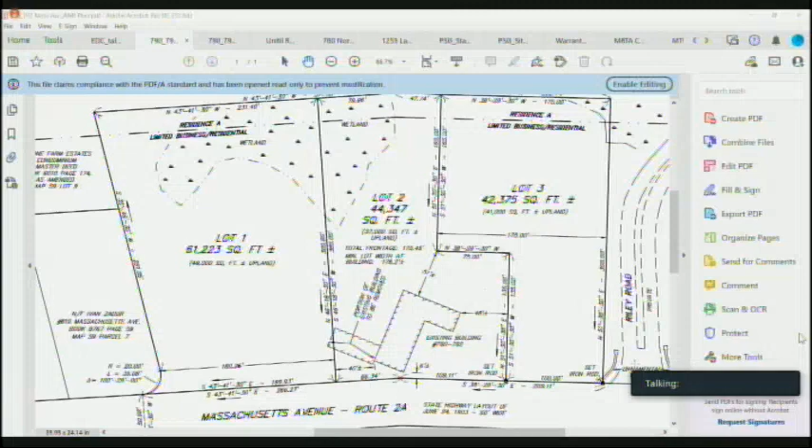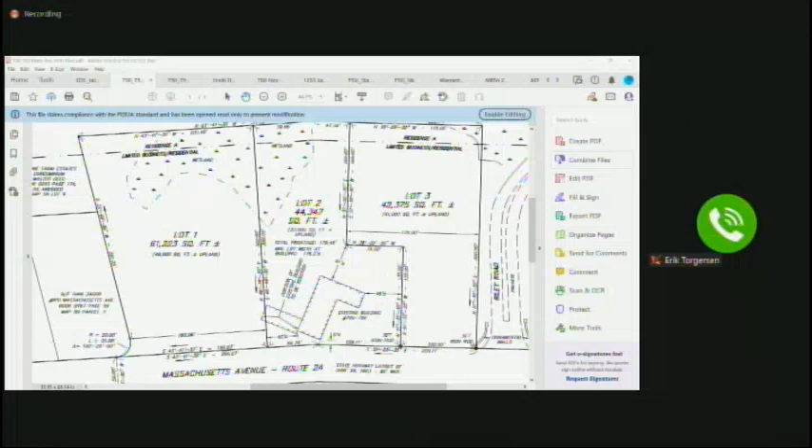All right. So Paula, Eric, any comments? I don't have any comments, Mr. Chair. Nothing, Eric? No comment. Okay, then I guess we could accept a motion to approve the A&R. So moved. Is there a second? Seconded. Excellent, Paula and Eric. We'll do a roll call vote. All in favor of approval? Paula? Aye. Eric? Aye. And an aye for myself. It is subdivided again. All right.

Economic Development Committee. So, it's a two-tier thing, and I don't think I sent out the second email, but J.C. Nickel is in the process of moving out of town. So she would not be able to continue to serve as an at-large member of the Economic Development Committee. Oh, bummer. She has offered her resignation from the at-large position and asked to be appointed to the ex officio business member position. J.C. Nickel.

Yes. Okay. And Josie Gilchrist, who's here in the audience, has put her name forward through the talent bank as a potential resident at large. I believe Josie also owns a business, so if she wanted to come up, you could come to the podium.

Certainly, if you'd like. Introduce yourself. So what this would do is this would fill one more seat on the committee, and then the last open seat would be that to be appointed by the Open Space Committee. Okay. Hey, welcome, thank you. Hi, I'm Josie Gilchrist. I've been a resident in Lunenburg for 4 years. I'm from Oklahoma. I own You Name It, Life and Home Revamp. It's a home improvement company. We've been in operation for 2 years. But I think I can serve you guys pretty well. I'm in the thick of it, so.

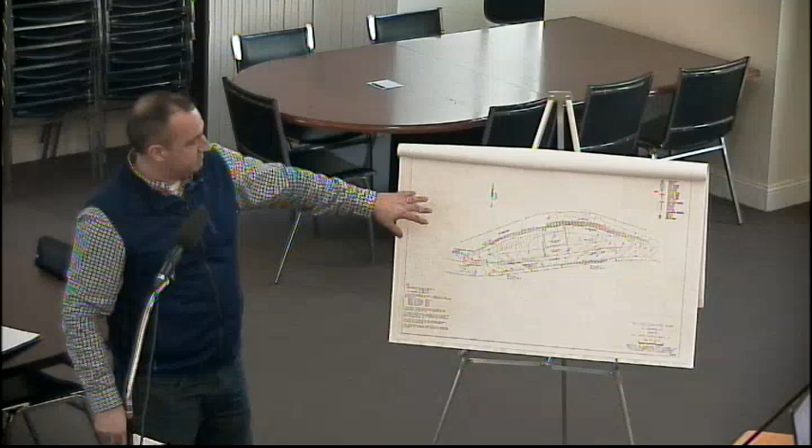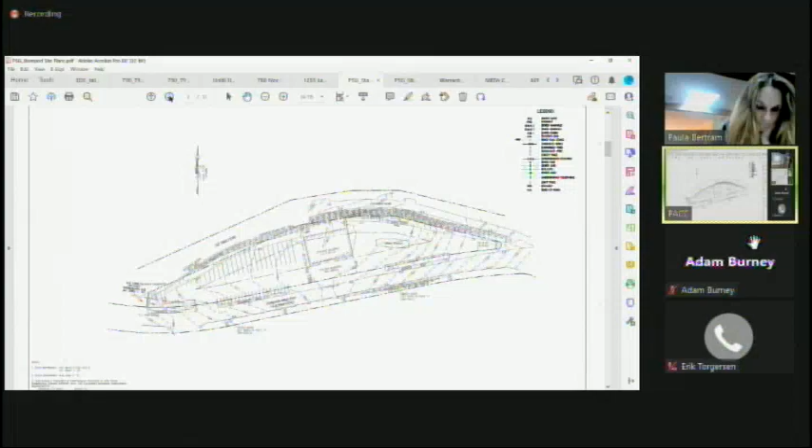So the existing site, I'd like to mention, there's a septic system on the property, and the building right now is served by a public well. The well is located in the parking lot right in front of the building. There's no stormwater infrastructure on the property. All the stormwater runoff runs into Leominster Shirley Road and runs down the street to existing stormwater infrastructure that's within Leominster Shirley Road near the intersection of Route 70. And a portion of the roadway also just directly sheet flows off to the east side and to the back where Low Places Ranch is now and where Jimenez used to be.

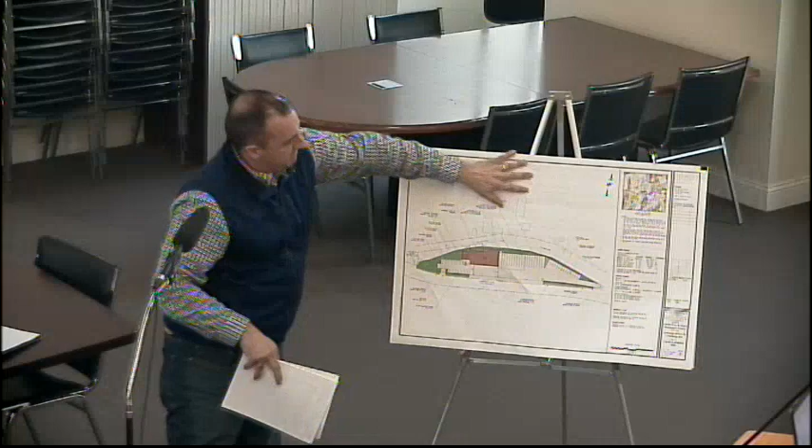So what you see here now is the proposed development. We've taken a site that's about 2.36 acres in total area. It was about 85% impervious, so the majority of the site was paved with the exception of some of the areas around the periphery of the site. We've proposed this building in this location now because the existing garage is going to stay in operation until the new building is constructed, because they want to keep the operations for the construction business, Palestone and Gravel, open while this takes place.

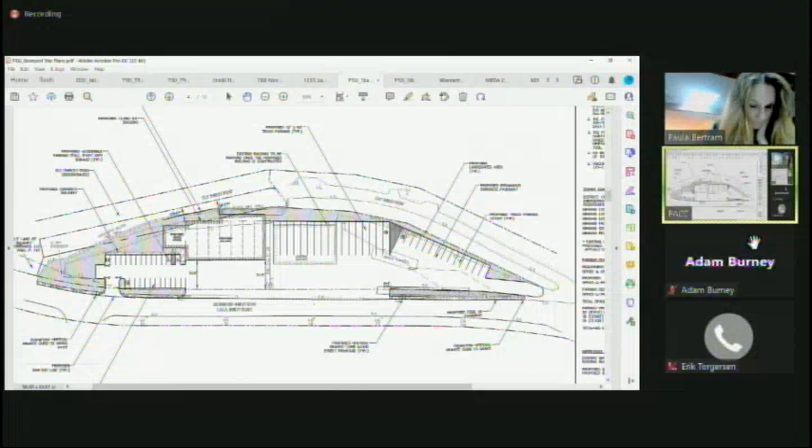So what we've done here is we've realigned all the parking on the west side of the property to keep employee parking and visitor parking separate from the main truck traffic. Right now, it's all commingled, so the employees and visitors park pretty much right in front of all the trailer trucks and the active construction vehicles that come to and from the site. So all the employee parking and visitor parking will be located here to the western portion of the site.

We're proposing a little bump out to the building. The main body of the building is a 7-bay garage. Office will be located to the side, and we have a tire storage and compressor room bumped off the back. So the main body of the building is about a 12,000 square foot building with a little bit extra square footage for office and storage areas. The existing building that's out there now is about 8,700 square feet. So building size will be increasing, but we are maintaining the existing setbacks that were approved through the zoning variance that was previously obtained.

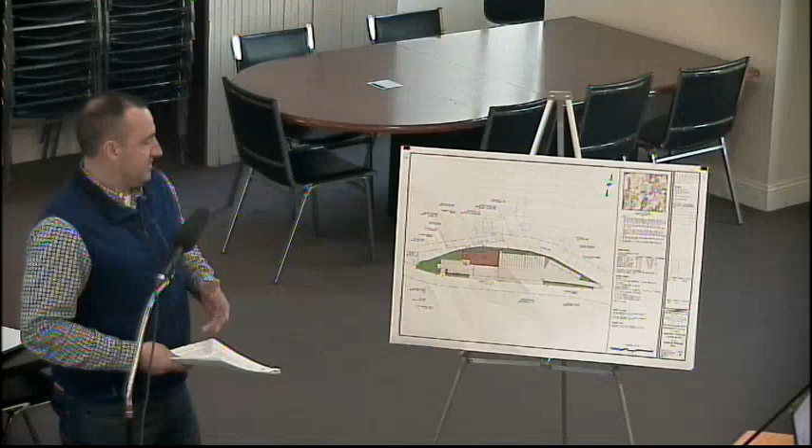The proposed site, as you see it here, results in a reduction in impervious area. There's a total of about 84 and change thousand square feet in the existing condition. It's about an 84 or so percent impervious cover. And we're proposing about a 4,000 square foot reduction in impervious area. So the site really is a redevelopment, but according to the new stormwater regulations in town, we're still providing stormwater infrastructure here to treat the 1-inch runoff volume, and to infiltrate and treat the stormwater runoff so we get our 80% total suspended solids and 60% phosphorus removal.

As I said, the existing site is fed by a septic system and a public well. The proposed site is still going to have a septic system. Right now, the septic is down in the eastern portion of the site. It's going to stay in operation while the proposed building is built, since the existing building is going to remain in operation. But the existing well that's on site is going to be decommissioned. Right now, we have plans in front of the water department. We're proposing to extend the water main from Keating's, from Reservoir Road, all the way up to the intersection of Route 70, and to feed this new building off of a town water main.

That's with the water department. They're in negotiations. So we've had discussions with the water department. We know this building can't be opened and occupancy permit obtained until that water main is extended. So we're looking for a condition of the approval from the planning board to condition that the water department is satisfied and the water main's been extended before the building or the applicant can receive their occupancy permit. However, obviously we need all the approvals in hand while that's kind of in the works.

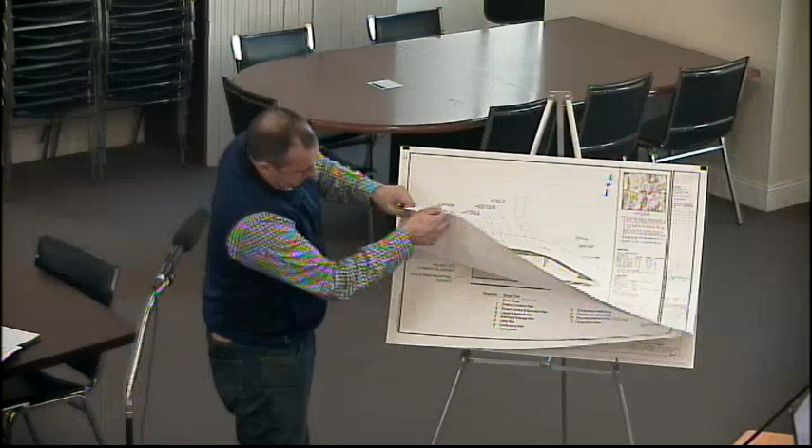So what I'd like to do is show you here a little bit more detail about stormwater on site. So as I said, the existing site, all the stormwater runoff just left the property untreated into Leominster Shirley Road. The proposed site is now being graded to have a stormwater collection system. There are catch basins proposed on site. We got one here by the office, an additional down by the eastern portion of the site on both sides of the pond. Those will be equipped with water quality units in order to achieve the 90% TSS before it's infiltrated.

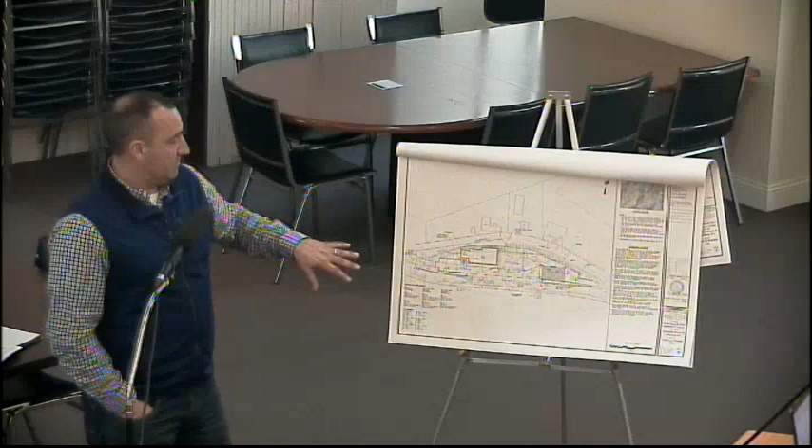The soils here are very sandy. They're great gravels, so we're not anticipating any issues with infiltration. However, we're proposing the infiltration basin right now where the septic system is, the current one. So one of the things we asked for when we put in a note is to do the soil testing for the stormwater during the construction phase of this. It's one of the comments that Graves Engineering made. They're in agreement with it. And we're asking to provide that information to you before the system's built. And Graves and the town will have an opportunity to review those test pits before the system's installed.

One item here that we're showing is a piped connection to the drainage infrastructure within Leominster Shirley Road. There are catch basins located along Leominster Shirley Road here down at the intersection, one in the middle, one above. So stormwater infrastructure, there is a pipe network within Leominster Shirley Road. We worked with DPW to find out the exact location of that, and we haven't been able to yet. And with the transition now with Rob Oliver leaving the town, we're gonna have to pick that up with the next DPW director and potentially test pit within the roadway to locate that. But we know there is stormwater located in there.

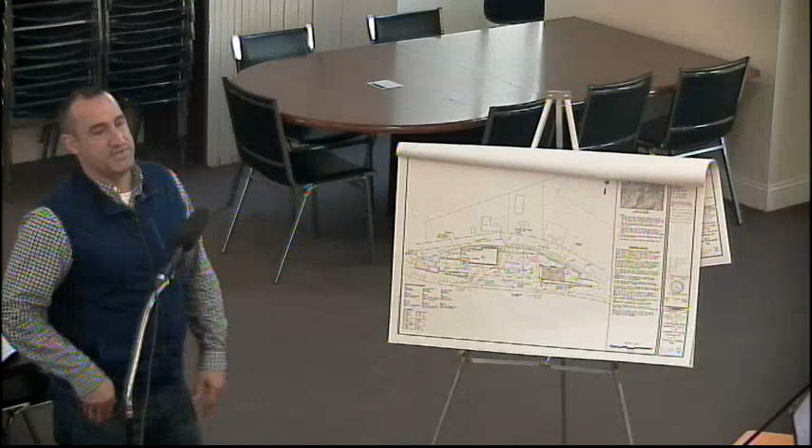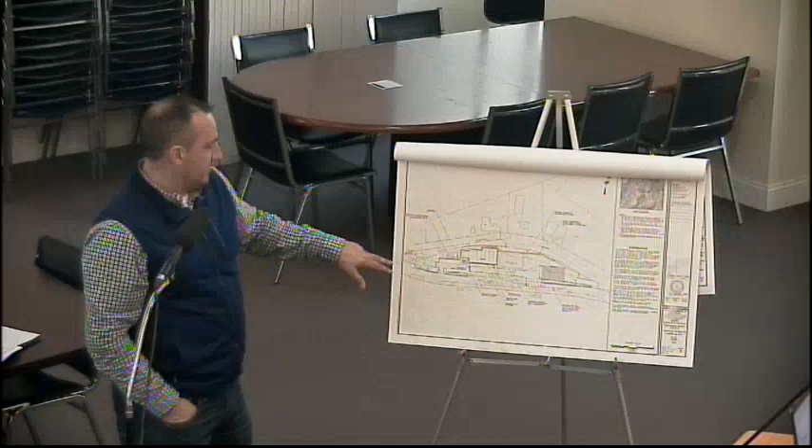And worst case, just below the property at the Low Places Ranch parcel, we know where the pipe is down there. So worst case, we would just have to trench a little further down the road to tie into the stormwater network. And like I said, that's the stormwater design. When it comes to utilities, the water we're proposing to pick up from the extension. The electric is available on site. Sewer, we're going to reconstruct the septic system. We have discussed this with the Board of Health, and Board of Health's on board. We just need to do a revised septic design and get approval for that at a later date. So we'll do that obviously before construction. And because of the size of the building, it will require a fire protection service. So that's another reason for the water main extension.

So that's pretty much the design. Graves provided their comments, which with the February meeting being canceled, we had an opportunity to revise the plans and resubmit the revised set to Graves so we could have our second round of revisions before the planning board meeting. And we've gone through all the comments. Pretty much everything was resolved. There were just a couple of comments left that Graves deferred to the planning board's judgment. So if we can, I'll just read through their comments and we can discuss. Certainly.

Let's see. So comment number 1 says GEI has no issues relative to compliance with the zoning bylaws except as noted as follows. All paved areas are required to be separated from the lot lines by a 4-foot wide landscaped area. Additionally, all paved parts of the parking spaces, driveways, and maneuvering aisles are required to be set back 15 feet from any lot line. Neither the existing conditions nor proposed improvements comply with these requirements. However, the proposed improvements better organize the site, separate passenger vehicle and truck traffic, eliminate passenger vehicle parking in the Leominster Shirley Road right-of-way. It better organizes the curb cuts, improves the landscaping along Leominster Shirley Road. GEI defers to the planning board whether the pavement setbacks proposed are acceptable.

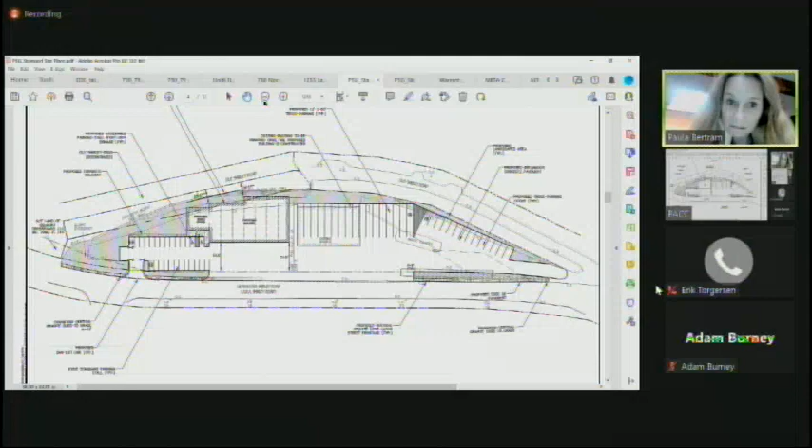Mrs. Bertram or Mr. Torgersen, do you have any questions? I do. The septic system, you mentioned it's going to be to the side, next to the proposed office area. Correct. Have you done soil testing there? So the family has dug on this site previously, yes. We haven't done it recently, but we know the soils based on where it's been excavated down at Low Places Ranch, which is just to the east of this, as well as adjacent properties right here.

The sand is deep here. We only encountered ledge almost approaching Keating's driveway further east up the road. So we know the soils are sandy soils, and we're highly confident that we'll have no issues here on the property. And we've already talked with the Board of Health about an approach, where to put it, and our flexibilities here. So we're not concerned at all about getting a system that's adequately sized for this building.

Okay, so when you talk about adequately sized for the building, what are you sizing the system for? I don't have the exact flow, but it's sized per vehicle bay and per office. Okay, and how much office space is it? Let me see.

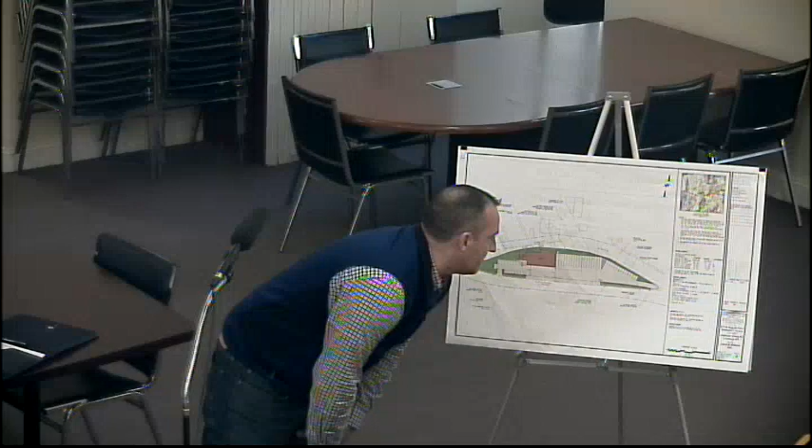We don't have it divided, but looking at the size, it's only a 40 by, maybe at most a couple thousand square feet. Not even, actually, it's about 40 by 40. So it's less than 2,000 square feet. Okay.

Okay, so you went over the revisions based on Graves' review. Has Jeff done another review on the revised plans yet? This is the review on the revised plans, the one I went through. Okay, so that's what you were reading? Yes. Okay. So he did one review back in February. We got his comments back, we revised the plans, resubmitted them, addressed all the comments, and he came back, what's the date? March 4th with the second review.

Okay. There are a number of comments that were sent out from other departments. Did you receive those? Yes. I don't have a copy of that here, but I believe the only comments were, looking at the Board of Health, the only comments at this point were from Jim Gareffi, agreed that we'd have to submit a revised septic system plan. And then most of these from Board of Health are all building permit related after the fact. So that's not an issue.

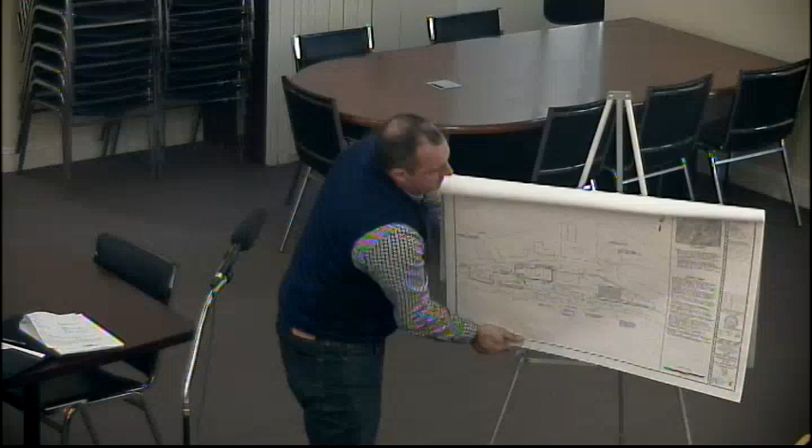Okay, and I'm not sure I understand Rob's comments. I believe the former DPW director's comments are in reference to what Mr. Marchetti was speaking about, locating the drainage in Leominster Shirley Road and ensuring that they match up. I actually gave him my copy of them. I believe it's about locating the infrastructure and ensuring that the tie-ins are meeting elevation-wise.

Yeah, so the existing site, as I said, was 84,000 square feet of pavement. The whole site ran into Leominster Shirley Road. The proposed site is 4,000 plus square feet of impervious less. So even if we didn't put a pond in, we're reducing the amount of flow that goes to Leominster Shirley Road. Because of your new stormwater bylaws, we have to treat the 1-inch water quality volume, plus the TSS and the phosphorus. So we've put in a significantly sized infiltration system that more than exceeds the 1-inch water quality volume. So the reduction in runoff leaving this property compared to existing is significant. And we did provide a drainage analysis in our submittal to Graves that showed that.

So his comment was saying to make sure what we're discharging from the site doesn't surcharge the existing drainage system that's within Leominster Shirley Road. Okay. And we're doing that by a long shot.

Okay. And then finally, the fire department, did you locate a fire hydrant within 100 feet of the building? Yes, there's a fire hydrant across the street here already, and there's one down at the intersection of Leominster Shirley Road. So we didn't add another one because there's already one right there that's within that dimension.

Okay, and that tight tank is right here. The tight tank is right out of the building. Okay. So all the floor drains in the 7 bays are all tied to that tight tank.

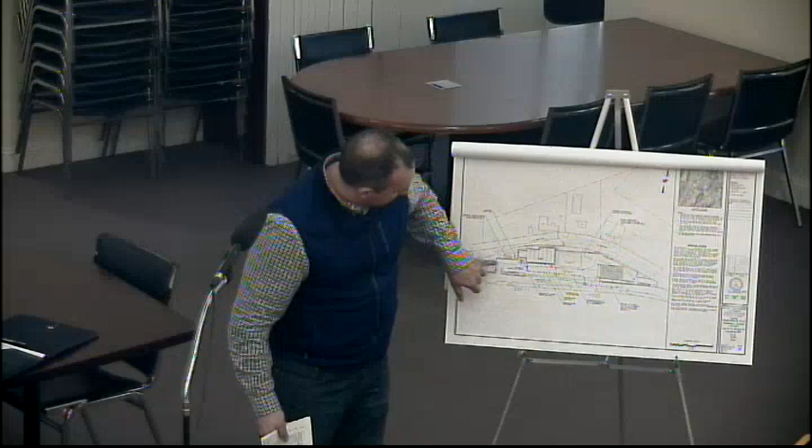Now that you mentioned that, excuse me, you're infiltrating pavement runoff, right? So are there separators somewhere? So all the pavement runoff runs to a catch basin here, catch basins down here, that routes it all back to the system. The floor drains in the building are all tied to a tight tank. So they don't need an oil water separator because it all goes to the tight tank. It all gets pumped out. So there's nothing inside the building going to our paved area or near the infiltration system.

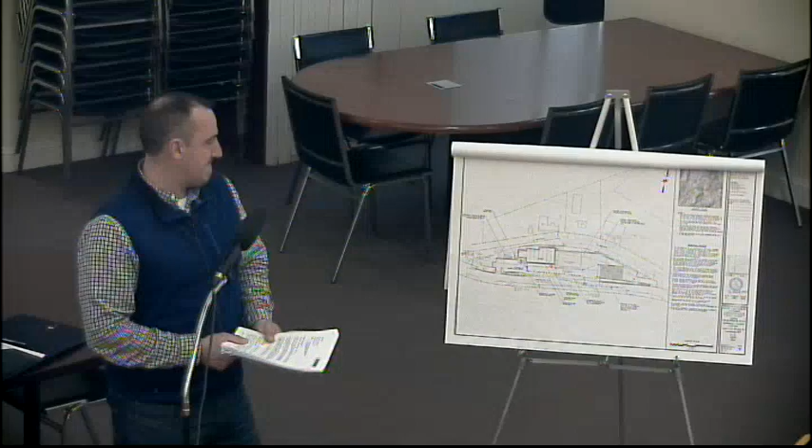Are you able to directly recharge pavement runoff without having a separator? We have catch basins and water quality units, so we have separators. Oh, okay. I thought it had to be right before the recharge area. It is, so we proposed inlet Stormceptors, so the catch basin is a particle separator. Okay, very good. Mr. Torgersen, do you have any questions or concerns? I do not, no. All right.

So I guess then the only other issue that we need to discuss as a board is the setbacks. I mean, I don't think we do, because the ZBA's already said it's okay, right? Just in terms of Graves' review, he deferred to us. I don't see any issues. I think it's a vast improvement over what's there. I just want to make sure that everybody else feels the same.

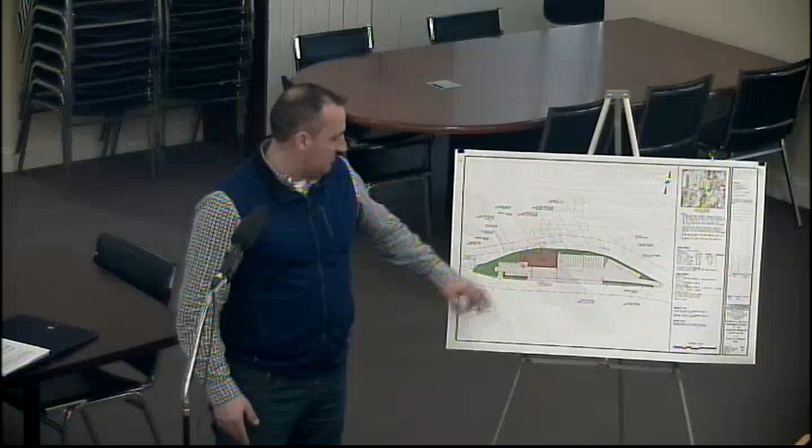Yeah, and the one overwhelming point that I want to make about that is because of the shape of the lot, it's long and narrow. To lose 15 feet would eliminate almost all the parking over here. It makes the vehicle traffic over here for construction vehicles very narrow and almost undoable. They couldn't physically pull in and back out of these spaces.

No, certainly this is a big improvement. I don't have any concerns with it individually. Any of the structures you're placing there are just landscaped islands. And you see what it looks like down the road, there's a lot more retail shop stuff than that in the right-of-way all over town. This is a huge improvement to the existing conditions.

Yep. I think there is one other thing the board needs to take under advisement as they look to close this up. Mr. Marchetti mentioned putting the drainage system where the septic system currently is. Per the standard conditions, when you are granted a stormwater permit, you're required to install your stormwater infrastructure first, and it needs to be functional prior to moving forward. So clearly, that condition would be an issue here. It's not something that can't be removed, but the board needs to be aware that this would be an alteration to the existing conditions.

And I don't know that it's going to have a big impact because of the situation that's currently there. It's not a raw piece of land where it's currently not having stormwater contributions to the road. And what they're doing will probably reduce that during construction, but it is something that would need to be removed from those conditions. Okay.

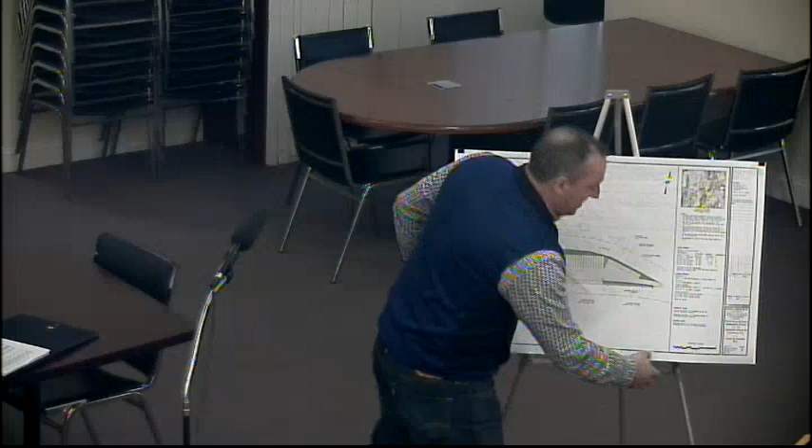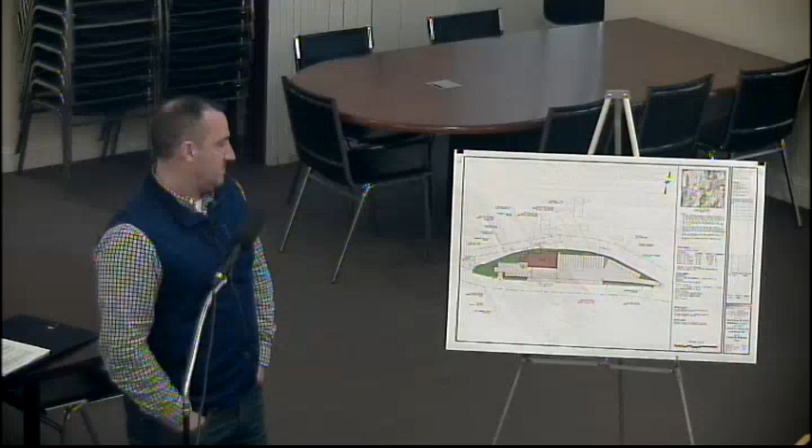I knew you were going to ask that because I left my scale at the office. 260 feet? I don't know. Honestly, I was going to say 240. So we've got, that's 160. I'd say it's probably close to 300 feet, the full width of it. And the 300 feet being all three cuts, or one? Okay.

There's an existing curb cut over here now that's 30, it's really wide. We're narrowing it to 24. And then down here, it's wide open for probably 200 feet. We're closing the whole thing up. We're maintaining access because this is a path where they take vehicles back and forth. They store vehicles and equipment down below here, so they don't have to take excavators and big machines out onto Leominster Shirley Road to move them between properties.

Yep. So Old Shirley Road, is that a public way still? It's public to here. It is? I thought the entire thing was abandoned. I think it was discontinued just from this location down. Okay. Yep.

Any other issues? No, I guess that blanket site and lot, site and building, ZBA's determination. Yeah, because it was pre-existing non-conforming and they were issuing alteration to that. Yep, that cuts our legs out again. Well, I don't know that it cuts your legs out. I think that's the vehicle for making alterations, and I don't think this is the only site that will ever deal with this,

but it's a property owner looking to make improvements to a site that wouldn't ever get made if they were required to meet what exists now. This site has been this way for decades. Yeah, I know. So I don't know that it's cutting the feet out as much as it is providing some clarity from a subjective perspective. Well, just the fact that we've got a bunch of bylaws written that don't allow stuff like they're showing kind of cuts our feet out. Correct. Okay. That's all I was getting at.

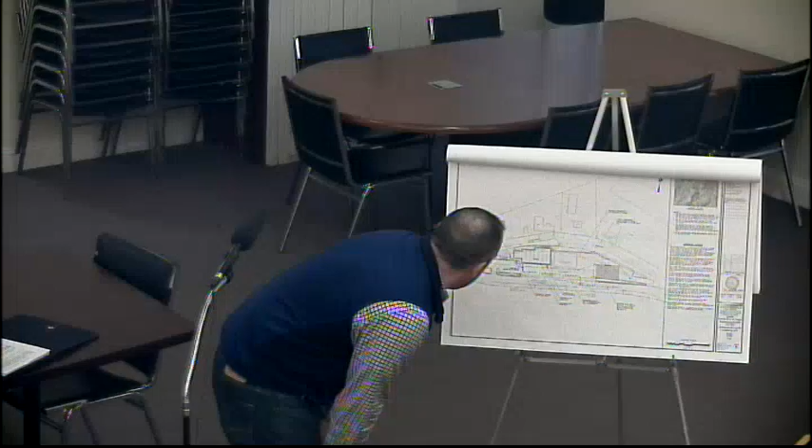But, so you can't bring water from across the street? Wait, are the hydrants across the street? I'm trying to think what that was, I don't want to misspeak. It's hard to have hydrants without water service. Yeah, you're right. Are they fed by a water line? At the corner, I think, it's not across the street here, it's by the bridge, and we couldn't get water across the bridge because you needed easements from the rail. Yep. So I misspoke.

To be honest with you, I thought there was one within, but now you say that, we wouldn't be extending the water main if it was. If you had water across the street, yeah. Totally misspoke there. So when you do the water main extension, then you're going to provide the hydrant. We have the water main extension plans, I can forward you a copy. I think that's the problem here: we did put one on the site. It's on the water main extension plans, it's not on this site plan. Okay. And I expect it would go right in that island right out front.

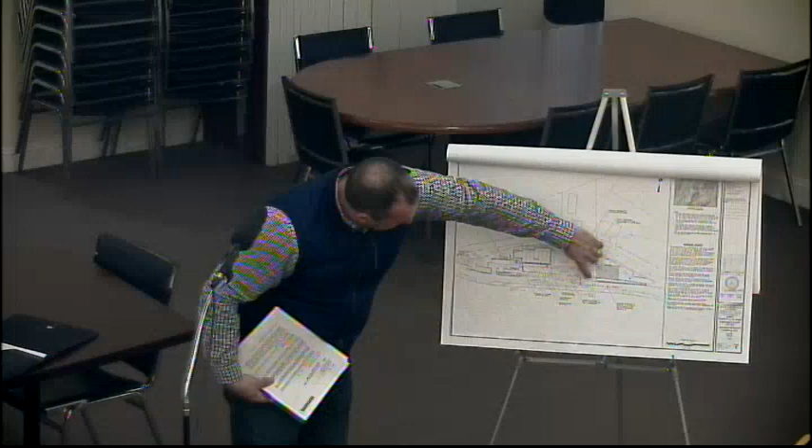There's an island here, right next to our main. Yeah, there's an island here next to the main, and we have area right here next to the office where it could go as well. Okay. Any other? Mr. Chairman, yes. I would tend to agree with Mr. Allison. I don't have any problem with the proposed layout and the site plan.

However, I do have a number of concerns regarding the moving parts that are there, you know, whether it's going to be a well, whether it's going to be public water. I'm concerned about the fact that the stormwater system isn't going to go in until after construction, because what happens to the stormwater during construction?

The building could be installed first, and that's almost entirely within the paved parking area right now. So, you know, we're basically taking up pavement with building. So there's no real transfer or change of cover type. No, and it's active construction, it's over an acre, so we're gonna have to file a SWPPP, so we're gonna have to control stormwater and sediment throughout the whole construction process. So that's really just a construction staging issue.

So I would want that clearly articulated in the permit. Additionally, I'm concerned about the fact that there isn't soil testing where the septic system is going to go. I'd like to know what the septic system is. I can't really tell the size of the existing system. But personally, I'd feel a lot better if we had a deep hole and a perc where the system is going to go.

And when do we expect whether or not you're going to be able to extend the water line? What's the timeline? I mean, it's under review now. I couldn't really tell you how fast it's gonna be, but I know they wanna have this thing under construction this year. And I know Powell was talking with all the people tying into it on the street here; they're contractors. So they're probably gonna be self-performing all the work and paying for the work themselves.

So when did you submit the application to the water district? We filed this probably last summer. Well, that is really concerning that we still don't have an answer. So we have no idea of a timeline on what's going to happen on this site. Sorry, I was gonna say, these are all building permit issues. They're not gonna issue building permits until these things are finalized. I don't think this can be something that holds up a site plan approval.

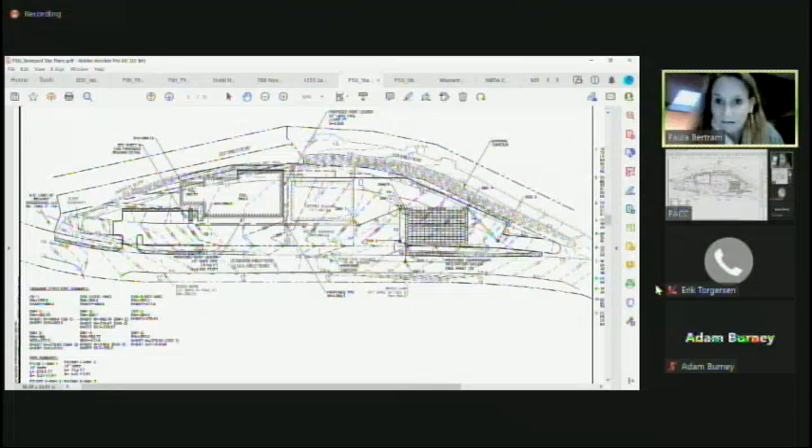But it does relate to the site plan, because if we find out that you do have to put in cisterns or you do have to change your fire protection, that affects the site significantly. Yeah, and we'd file a modified site plan.

In terms of Mrs. Bertram's concerns about the building construction and soil erosion control, this is just a layperson's perspective, but the area where the new building is going is currently impervious. It's almost entirely parking. That's where they park all their trucks now. So logically, you're gonna cut out all the asphalt, and that area that you open up, which is probably 20,000 square feet to put the 12,000 square foot building in, is then gonna be sand.

Recharging, yeah. And theoretically, you're digging a hole to put your concrete footings in and so on. So all of that is basically its own detention basin on a temporary basis until you get concrete in place. And then once you have concrete in place, you no longer have sediment issues.

And while that's being installed, the septic system that you see right here is a design footprint for what we're anticipating for soil here, which is based on previous soil data they have around the site, which is based on the NRCS soil survey. It's a sand. So it's all sand in this area.

I mean, my take on the details of the permit and whether we condition things, close the hearing, vote on approval, and then talk about conditions, I certainly understand where some members of the board have concerns about how this all shakes out. In my mind, we've flushed out all the major issues other than the stuff that revolves around the water line. It makes more sense to just continue until you have that done, and then as soon as that's done, we can close the hearing and approve it, and we don't have to come back for a change.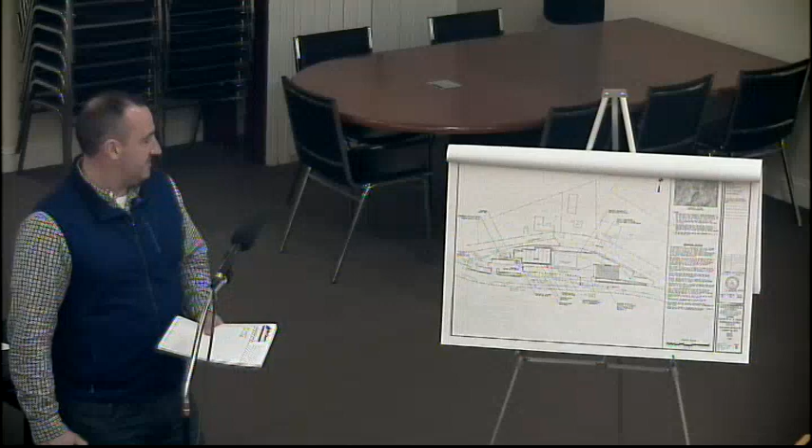I think the issue was crossing the bridge. Okay, that makes sense, unfortunately. I think the cost was incredibly high. Okay. And, you know, never mind how long it would take with the chambers and railroad permitting, and it had to be fast. Very good. All right, thank you.

I will entertain a motion to continue the hearing for 225 and 259 Leominster Shirley Road to March 28th at 6:35. 6:05? 6:05, yes, our new and improved time. So moved. Second. All those in favor, roll call vote. Mrs. Bertram, aye. Mr. Torgensen, aye. Mr. Allison, aye. And I for myself. Thank you. All right.

780 Northfield Road, map 38, parcel 17, under MGL Chapter 40, Section 15C, Scenic Road Designations, and under MGL Chapter 87, Section 3, Cutting of Public Shade Trees. Owner applicant James and Allison Latanzi, 331 Marshall Road, Fitchburg, Mass. The application is available for viewing at the planning office at 960 Mass Ave, Lunenburg. Thank you. Welcome, Mr. Latanzi. Would you like to fill us in on what you're looking to do?

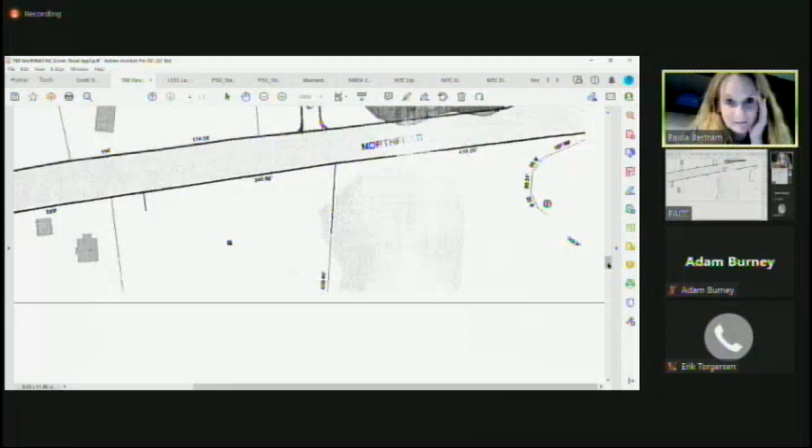I just would like to have a better understanding of the trees and the stone wall. I'm zooming through pictures. I don't have it with me, but if we, oh, that's upside down. It looks like you took the pictures before you flagged them. Is that possible? Yeah, it is entirely possible. When I did my submittal and we had a discussion afterwards. Yes.

So in that picture, the one that's currently up, that's what we're looking at. That dead tree to the right and the one to the left. Yep, oop, mouse just went by it. And one to the right. 1, 2, 3. Three in that picture, yes. And I'm assuming that these trees are right adjacent to the wall? Yes. Any tree clearing beyond that is outside of the... But how much of the wall will be affected? Roughly 40 feet of the stone wall.

And does the stone wall go all along the property line currently? It does not go on the entirety of it. It breaks where the brook comes out of Kelly's Pond. Which is a less than ideal place to put the driveway. Correct. I'm not sure conservation would say that's okay. I believe that would not fall under exemption. Yeah.

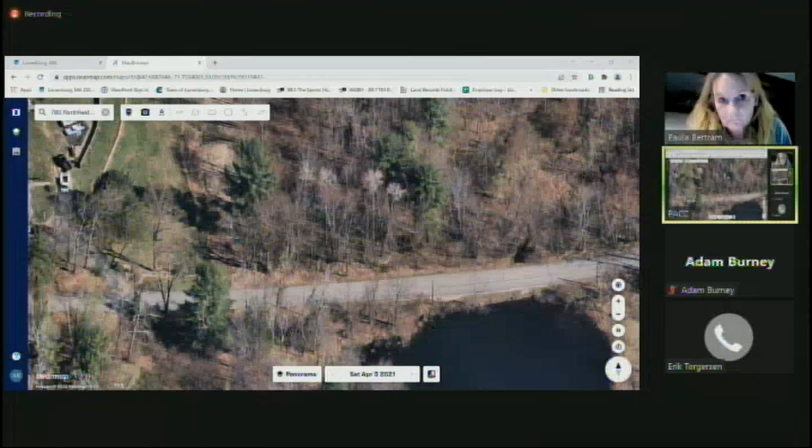So with that, I would entertain a motion to continue the public hearing. I think you should schedule the site walk before you continue, just to keep it all within the hearing. Okay. So we've got 2 weekends between now and then. Are we gonna do it on weekend or weekday? Personally, I would prefer a weekday. Okay. Weekday, I think she said. Evening. I'm flexible, so. How about next Monday evening? Would that work for people's schedule?

21st? I'm assuming we're planning to do it fairly early. I have another meeting at 7, but we'll be done by then, I would think. I would say like 5. Yeah, okay. I won't be able to make that, but you don't need me to. Okay. Trying to remember if building reuse is meeting every other week or not. I don't think so. So I'm gonna say that's fine too. But like I said, I've seen the site already, so. All right. So we will schedule a site visit for March 21st at 5 PM. Does that work for you?

And with that, I will entertain a motion to continue the public hearing for 780 Northfield Road to March 28th, 2022 at 6:05 PM. So moved. Second. Thank you. Roll call vote. Mrs. Bertram? Aye. Mr. Torgensen? Aye. Mr. Allison? Aye. And I for myself. Excellent. Our next hearing is 1255 Lancaster Ave. I'll send out a reminder about that.

Thank you. All right, so the Lunenburg Planning Board will hold a public hearing tonight via Zoom video conference to hear and review an application to relocate a driveway at 1255 Lancaster Avenue, map 139, parcel 1, under MGL Chapter 40, Section 15C, Scenic Road Designations, and under MGL Chapter 87, Section 3, cutting of public shade trees, by removing 1 tree and 40 feet of stone wall. The removed stones will be used to close off the existing driveway. Owner applicant James Allison Latanzi, 331 Marshall Road, Fitchburg, Mass. The application is available for viewing at the Planning Office, 960 Mass Ave, Lunenburg.

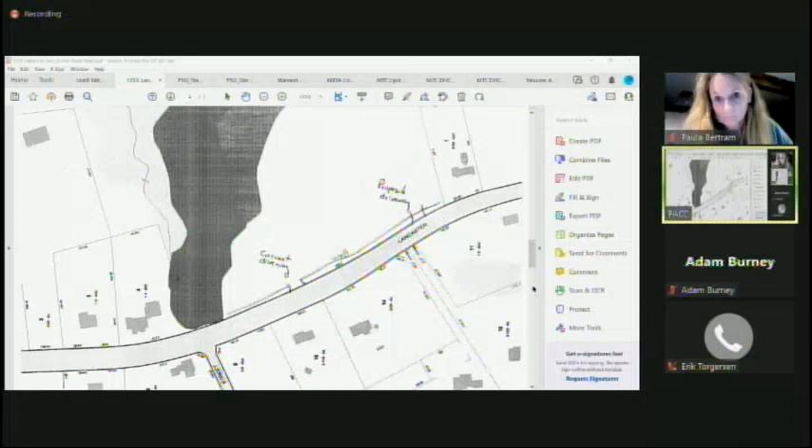The existing access in and out of that field is on basically the worst point in the curvature of Lancaster Avenue, and it has made for a very dangerous situation to enter and exit from the hayfield. I'm proposing to move that driveway, that field access, farther south, and you can see in the picture there's one white oak tree that I'm looking to remove, and the section of stone wall on either side of that. The tree is currently centered in what would be the middle of the driveway, so I'm looking to remove 20 feet of wall on the left and 20 feet on the right. Again, moving the driveway farther south gives you an excellent line of sight in both the northerly and southerly directions. Again, a complete safety issue for moving equipment in and out.

So it's across from where the old alpaca farm used to be? That's Gibson there. Correct. So this is a hill. Yes. It's at the toe of the hill, and he wants to move it. I guess sight distance would be six of one, half dozen the other, in my opinion, unless you are trying to exit in a tractor, you would know otherwise. Your sight distance, right? Yes, the sight distance from operating.

Right. I might point out, Mr. Cole may be experienced in entering and exiting this site, as he stacked hay here for me. And the elevation certainly works better, because the current driveway is at the sag, so you're pulling up onto the road, versus this would put you on higher ground and further away from the intersection.

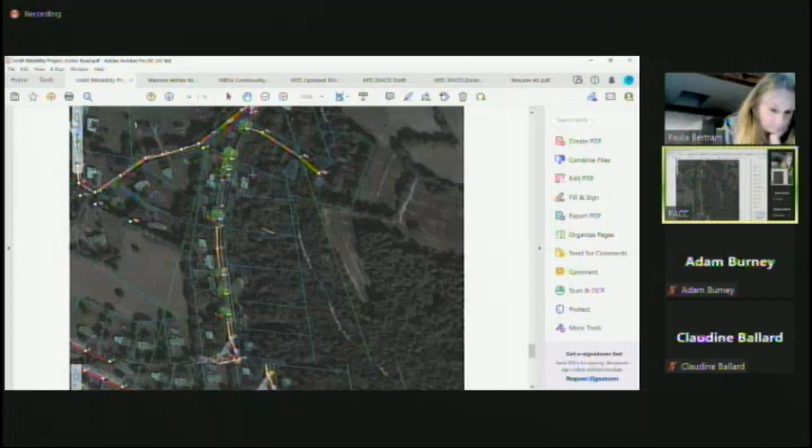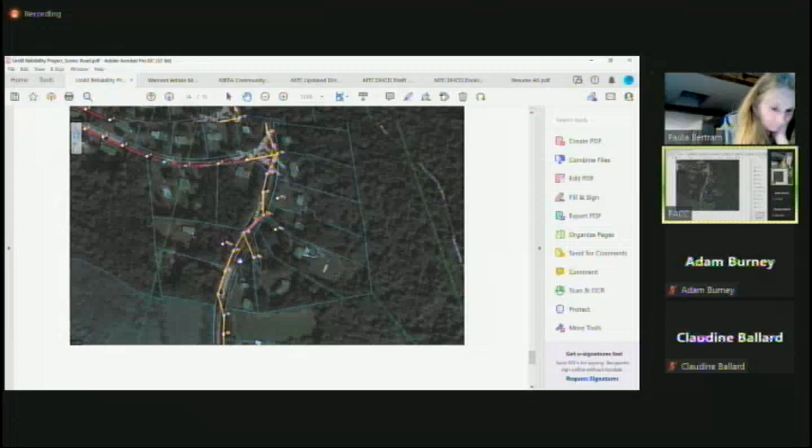Between Sunny Hill and Prospect, they're all on the wire side of the road, which would be towards the Fitchburg side. And then as you go down, the line switches to the other side towards the Shirley side. So there's a couple trees going up to Cherry Hill. I think there's 6 trees on that side, give or take. And then the line switches back over right at Cherry Hill Farm, and there's a pruning tree and a removal there. And then 2 more trees on the opposite side of the road, further down. It looks like they've been hit by a car or something like that.

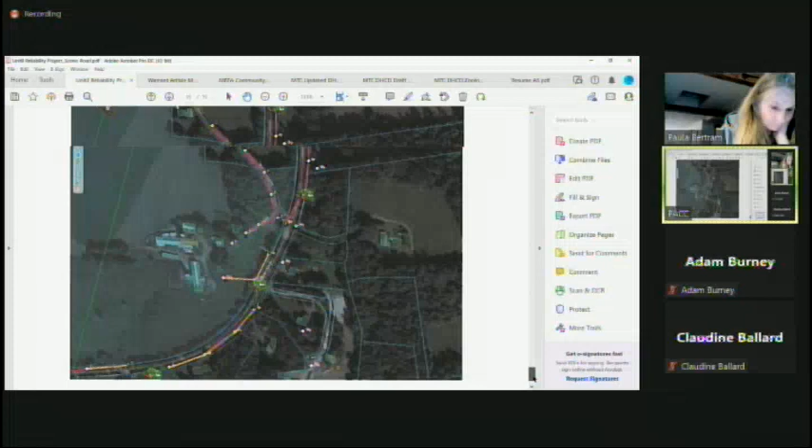Any questions or comments from the board? Another question: none of this is going to change when you do connect through Kilbourne, right? This is not going to be impacted at all by the construction on Kilbourne? No. You need this regardless? Yes. This is one of our worst performing circuits, and every year the Department of Public Utilities asks us what we are doing to work on our reliability. Over many years and many different studies, this is the best route for us to help reliability without a huge impact to all of the ratepayers.

So when they've asked you that in the past, what have you said? We looked at different ways. We looked at building lines from different areas, rebuilding our lines that come up through our Fitchburg area, double circuiting. And then we'd be double circuit in Lunenburg, which is not a very attractive look on a pole, when you have 2 sets of primaries. So this is taking a circuit that's already an existing pole line, taking it from a single line to a 3-phase line to help build our reliability.